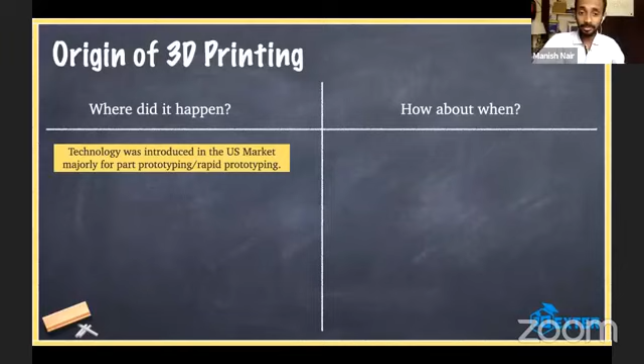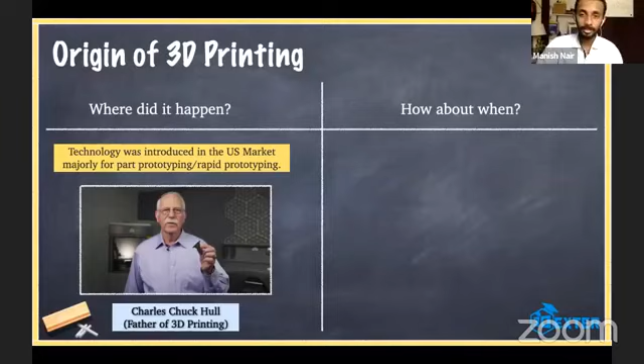Looking back at history, this technology was introduced in the US market, primarily used for commercial prototyping purposes. The gentleman you see on screen, Charles Chuck Hull, is considered the father of modern 3D printing. This technology came into existence in 1984, though the patent was granted in 1986. The technology came out for industrial applications in 1984, and people started utilizing it for all sorts of commercial and industrial applications.

But in today's times, people are using 3D printers. 3D printing has become so cheap and so easily available to every person that it is now accessible to each and every person. In fact, everyone on this call can have access to a 3D printer and realize the project they're currently working on.

I want to show you a very small video which tells you some things about the technology and where it particularly stands. I'll just run this video now.

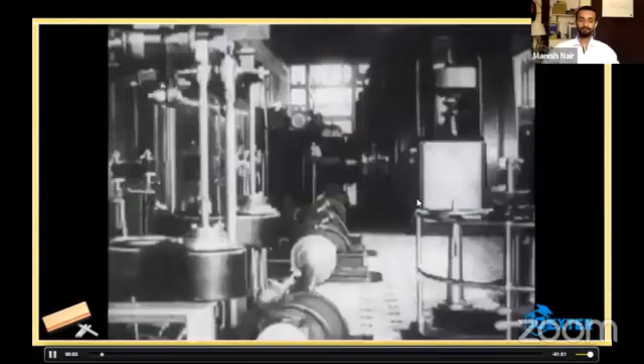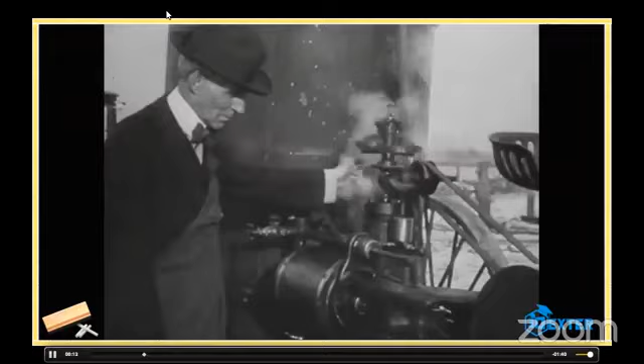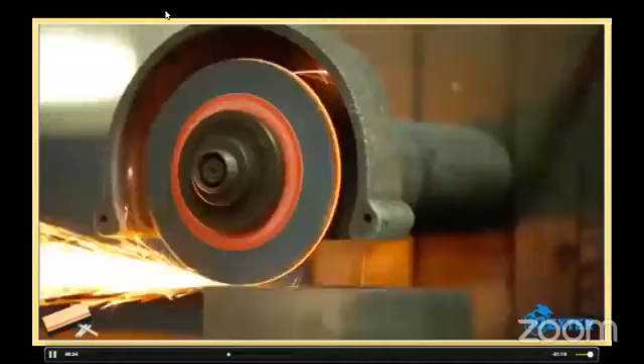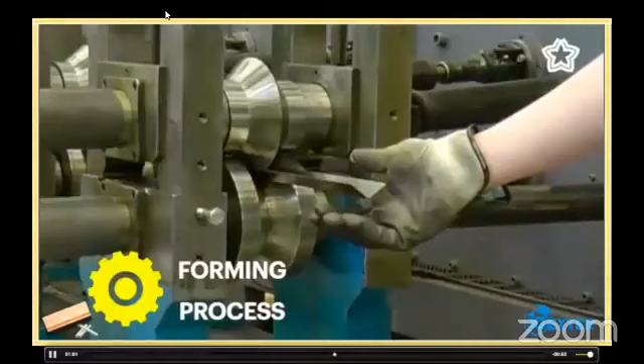For centuries, manufacturing processes around the globe have seen a paradigm shift in the way products are manufactured. These mega mass-producing factories have been able to satisfy the needs of millions of people with products we all love to use over and again. Thanks to the Industrial Revolution that made all of this happen. Most of the objects we see around are manufactured by conventional methods like casting, machining, or forming processes. If you look around your surroundings, pretty much everything you see, from the dress you wear to the technology you use, is manufactured by one or a combination of these processes.

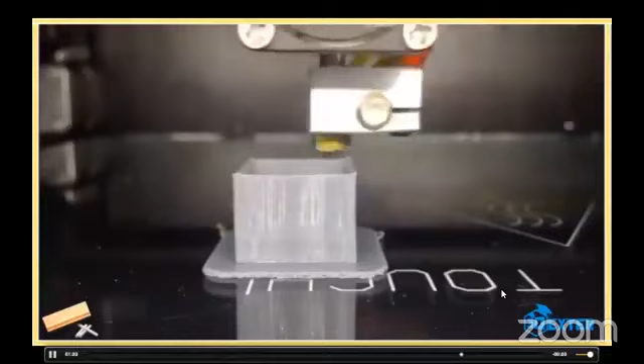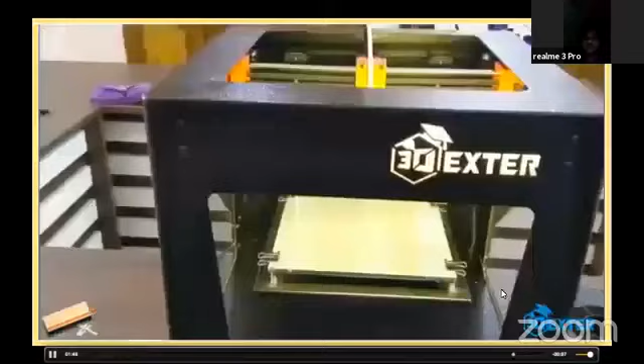In these fast-changing times of the 21st century, one of the technologies that has gained immense popularity and momentum is additive manufacturing, or 3D printing as we like to call it. It all starts with a design that you can create on any CAD platform. Then you eventually slice the model and finally 3D print it to bring it into reality.

All right, so that was a very small video that talked about the basics of 3D printing. I'm sure you noticed that the process of 3D printing starts by making a design. You can create this design on a computer, get it from a free hosting website, or scan a particular model, but essentially you get the design file. You take this design file to a slicing software, which slices the model into numerous layers, and this sliced file is then sent to the 3D printer for final 3D printing.

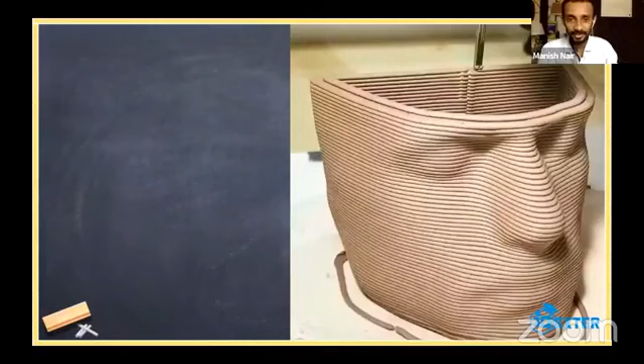I hope you really enjoyed viewing that 3D pen demonstration. Now, for those of you who did not understand or were not able to see it properly, I have got a small video showing you how this layer by layer process takes place. So enjoy this video, and I'm sure you will get a little more understanding of how this works.

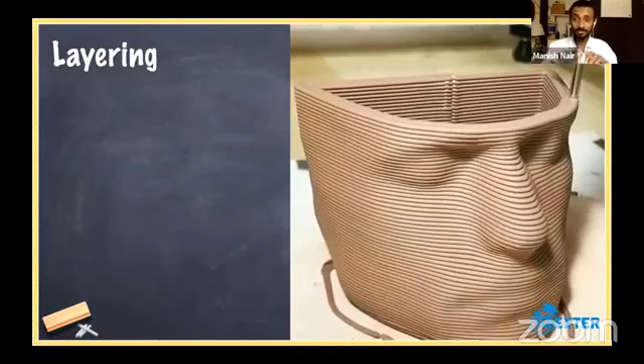This is basically clay 3D printing. So like I was mentioning, it's not just about thermoplastics. You switch to a different technology and you can use different kinds of materials also. You can see there is a nozzle, and this nozzle is basically taking out material one at a time, making a very small human facial structure.

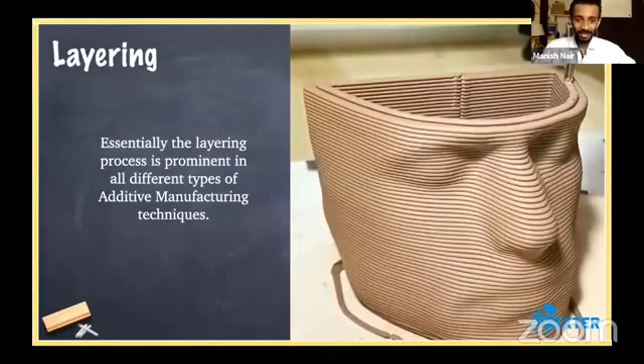Essentially, the layering process is prominent in all different types of additive manufacturing techniques, and this is very much basic to any technology that you can think of. It's quite comforting to see this video, isn't it? So that is what the layering process is. By this process, you form the final 3D object. I hope you got an understanding of what the 3D printing process is and how it basically works.

Next up, I want to discuss why we are even talking about 3D printing. You might feel, why is it that we are talking about 3D printing so much in today's times, in 2020? There are a couple of reasons. Many people say subtractive manufacturing is already there, so why are we switching to a new technology? We have got CNC machines, we have got a proper distinguished machining process. Why are we switching to a new technology?

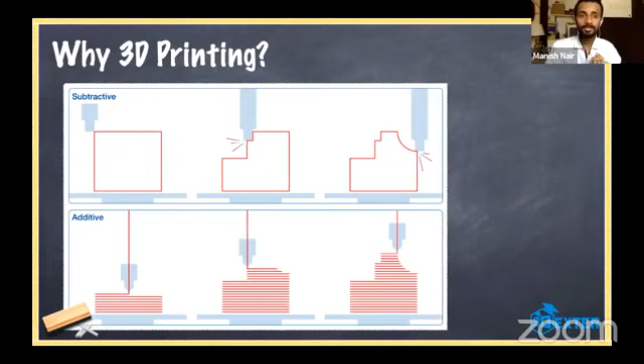What is the need? Now, to answer that question, there are many designs out there in the world which cannot be manufactured by any method that's available in the world. So for those kinds of designs, you will have to switch to a method that is additive in nature, and you can very easily develop that.

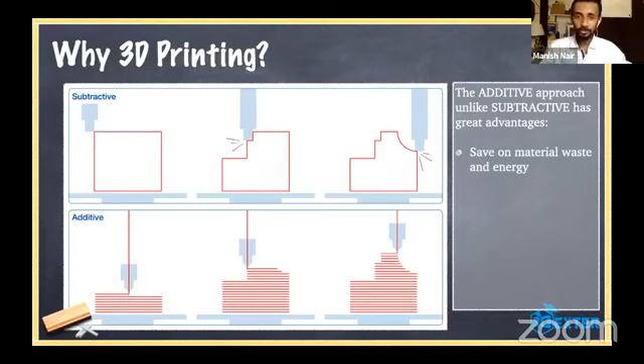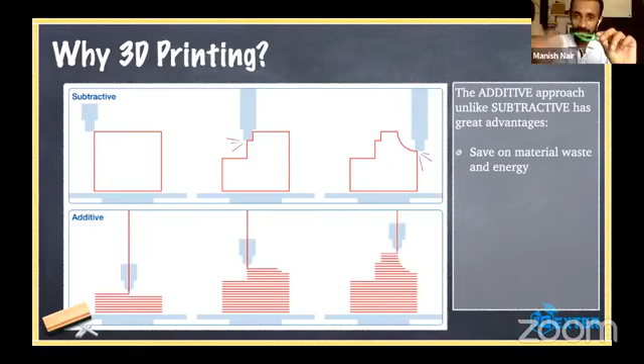So some of the key advantages of additive manufacturing are: one, it saves on material waste, a lot of material waste, and it saves on energy also. If you compare a CNC machine and a 3D printer machine, the power consumption used by both is miles apart. And if I show you this part we just made out of a 3D pen, you take out material only at those parts where you need the filament to come out. So there is ideally very less wastage compared to subtractive methods.

Second, like I mentioned, you can manufacture some very complex geometries. Third, and most importantly, you are able to do quick prototyping with very less lead time. Say 5 years back, if I wanted to come up with a new product or work on a new project and develop that first prototype, I would have to go to an injection molding equipment manufacturer and ask him to make a mold for this particular project and give this mold to me.

This entire process takes close to 3, 4, or 5 months of my time, and it will take a minimum of, say, 50,000 or 60,000 rupees to get that die prepared for the mold. Now that entire perception has completely changed because of 3D printing. Using 3D printing, prototyping has become so quick that within a few hours or a few days you can get your first prototype ready, and you will be pretty much very happy to see that.

Lastly, there is a very interesting case discussion happening all around the globe, which is about mass customization. In a very highly globalized world of today, we are actually moving towards customization. If you look at the mobile phones, if you look at the gadgets we use today, they are highly customized. And to meet customized demands of users, you need a technology like 3D printing that can cater to the demands of different kinds of people.

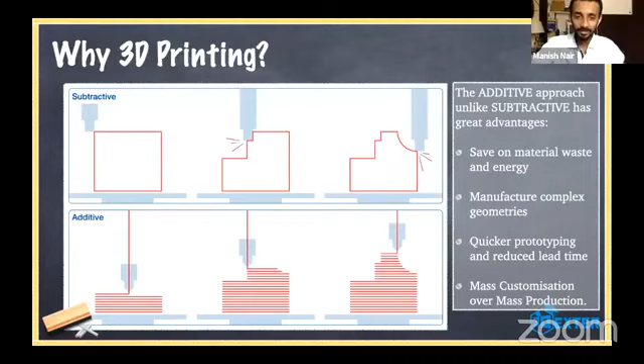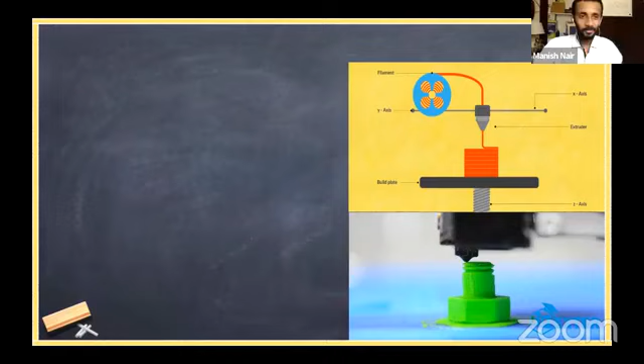All right, so we are done with the first part, understanding what is 3D printing. Now we are diving into the types and applications of 3D printing. This is one of my favorite parts, and in the next 20 to 25 minutes you will get a complete understanding of the different types and applications of 3D printing. So let's just quickly get started. The very common type used all around the globe is known as fused deposition modeling.

It's also known as fused filament fabrication. You can see that there is a material at the back. If I were to show you this material, it's the same material that we use in pens in an FDM based machine. So this material goes inside your 3D printer.

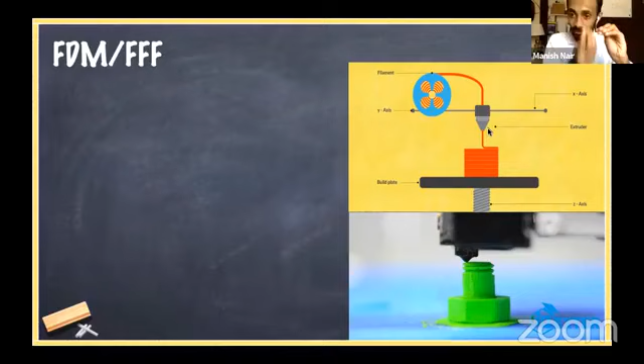Right now I have a 3D pen. If you had a 3D printer, it goes inside a 3D printer. There is a nozzle at the tip. This nozzle gets heated and the melted filament comes out of the printer, and finally you can see the files being printed. So you can see it goes layer by layer.

I'll just show you in this particular graphical representation. You can see it moves along the trajectory of the CAD file.

Right now, fused deposition modeling, or FFF, is the most common type of 3D printing. Many people say it's very common, but the reason for the popularity is because of its ease of operation. You can very easily operate a 3D printer. We have a 3D printing curriculum running in schools where children in 5th standard use our machines. Can you imagine, 5th standard? So that essentially means you need not be an expert in technology to operate a 3D printer.

Second is its cost. 3D printers are very cheap nowadays. And the third and most important part is its usability. Like I was mentioning, prototyping becomes very quick. Using an FDM based 3D printer, you can create prototypes real quickly and get to the final objective of coming out with the final product. One thing I want to tell you is material compatibility - thermoplastics is the major material used in FDM or FFF types of machines.

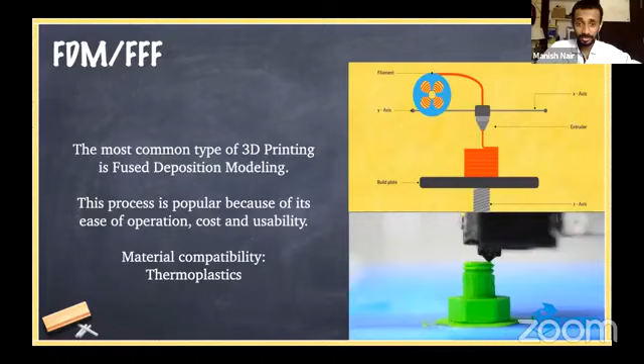Next up, I want to show you some more techniques used all around the globe. As you can see in this graphical representation, SLA is one technology which stands for stereolithography. In this technology, you have a liquid material and there is a scanner system. This scanner basically scans the CAD model layer by layer. After it scans one layer, then only the platform goes a level down. That is how the final object comes up.

Liquid material, or a material like resin, is used in these kinds of technologies. It's very handy and useful in medical technology. Medical practitioners use the SLA technique to create all sorts of applications. We'll come to the applications.

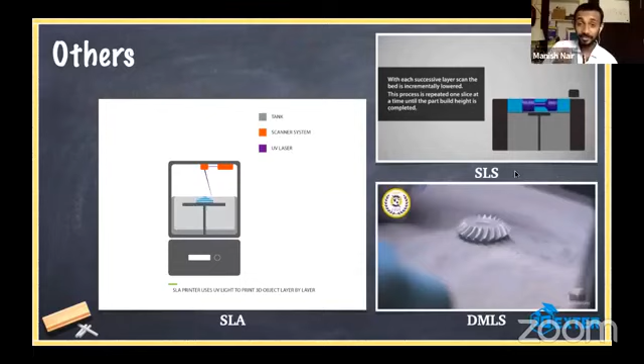Second one is SLS, which is selective laser sintering. In this process, you can use powdered material - it can be thermoplastics or metals. These kinds of powdered material are laid one layer at a time, and then there is a laser scanner which scans those areas where solidification is supposed to take place. Using this, you can get the final object.

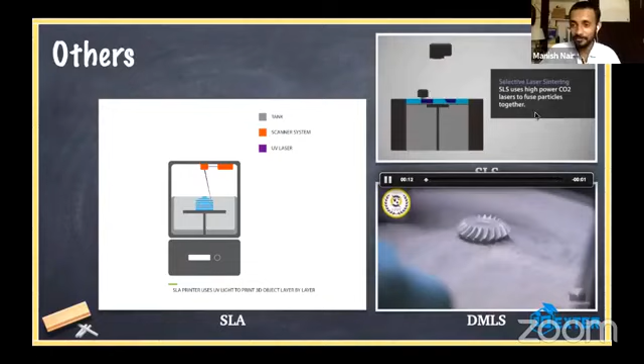Finally, I want to show you DMLS, which is basically somewhat like selective laser sintering, but in this process you use metal alloys. You can see in this graphical representation there is an engineer. The white color you're seeing is basically metal powders.

I think there is one person who is wishing to... Okay, just a minute. All right, so there was a small glitch that was happening.

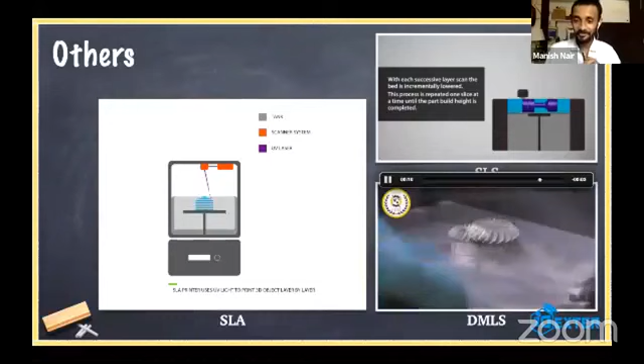Now it's fine. So in the DMLS method, you have powdered metal. You can see this engineer taking out powdered metal from the surroundings, and you get the final 3D printed part made out of a metal alloy. Commercially, as of now, I think close to 8 or 9 different types of metal alloys are available to 3D print if you go for a DMLS technique. But essentially, like I told you, it's layer by layer printing only. That's one thing you need to keep in mind.

Next up, I want to show you some examples of prototyping - what are the different kinds of designs that can be printed out of a 3D printer. You can see this is a pipe design, which has a curved opening at both ends, and these kinds of designs can be very easily made. It's an industrial prototype of a very small pipe design.

DLP is a technology that is used extensively in the jewelry industry, as you can see in this particular image. This is a prototype of a jet engine. Yes, it's not about the small parts - you can actually create major parts.

You can create as small a key, similar to a keychain, using an SLA machine. And this is a process called binder jetting.

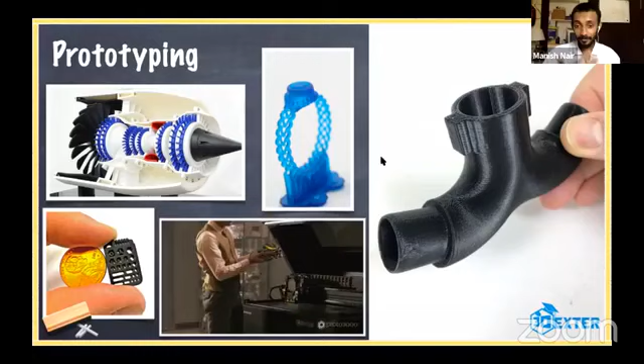You can see this engineer basically taking a helmet out of the machine. If you want a prototype in the actual colors, these kinds of models are also possible to develop out of a 3D printer machine.

Next up, the very interesting part. We are done with the major types of 3D printing methods. Now we're heading towards applications, and I'm going to show you the major kinds of applications prevalent all around the globe. If I'm being honest, applications of 3D printing are vast, and many industries are using it. But for the scope of this webinar, I've tried to include the most important ones that people new to 3D printing should know about. There are going to be some surprises in this section, so let's get started.

First, I'll discuss applications in the medical and healthcare sector, one of the greatest benefiters of 3D printing. Next, we'll go towards automobile, another greatest benefiter of 3D printing of all time. Another application area is aerospace, where we'll look at the different types of applications. We'll also look at how education and R&D are using the technology to come up with innovative projects.

Then we'll look at customization. Remember, I told you about mass customization? This is the section where we'll talk about what customization is and what it has to do with 3D printing. Finally, I'll show you some use cases of this technology in pandemic-like, emergency situations, and how this technology can be of use in those cases.

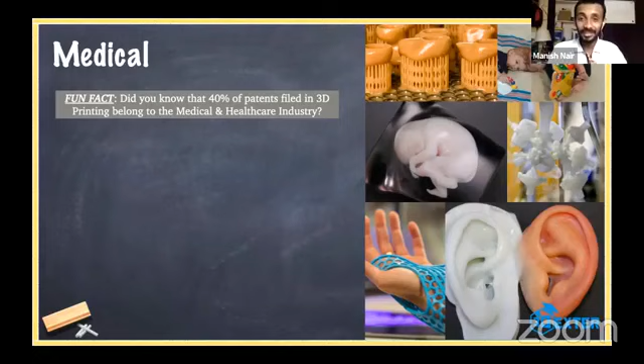There are way too many developments happening in this sector. For example, you can see these hearing aids that are now close to 100% 3D printed in the US. This is a statistic from EnvisionTEC: 96% of hearing aids, not 100%, are now 3D printed, with 10 million in circulation. That's a huge number.

Next, there are surgeries that eventually take a lot of time, and it's really difficult for doctors to come up with techniques to address these medical issues. It takes as low as 23 hours, which could have taken 97 hours for surgeons. This technology is not just giving another option for doctors, but also a lot of confidence, since they can practice the complete surgery on a mock model first, and then switch to the patient.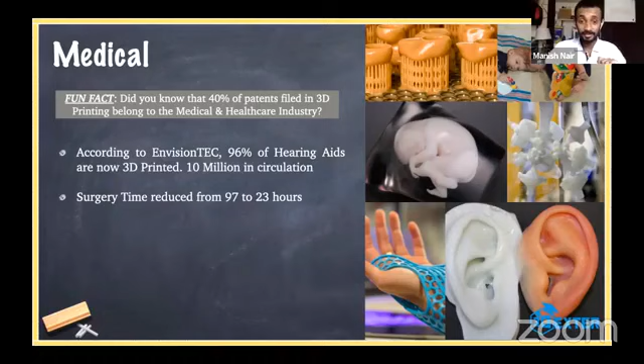Czech and Israeli researchers, among others, are doing a lot of research globally, and you'll be surprised to know there are functional 3D printed organs out there in the research field. Israel printed a 3D printed heart. There's also good research happening in the US where they've printed soft replicating cells of the human brain. You must be aware the human brain is the most complex human organ we have, and you never know how it actually works. So to address that, researchers have tried to replicate the entire structure of the human brain.

They are conducting experiments to see how the human brain reacts to different reactions. That's how research is going ahead in the field of 3D printing. Lastly, 3D printed medicines and prosthetics have already been a huge success. You can see this silicone-made prosthetic ear compared to a 3D printed prosthetic ear. Cartilages can be very easily 3D printed.

There is a specific compound called calcium hydroxyapatite, which is a compound of calcium, used to print bone structures like the bones we have in our body. These kinds of structures are also nowadays made out of 3D printers.

Now I want to show you a live video, not a demonstration. This video is taken from Stratasys India and shows a case study from India. You might be thinking we've only talked about the whole world so far, but let's talk about India. So I'm going to show you a small clip of a case study conducted in India. Let's move ahead.

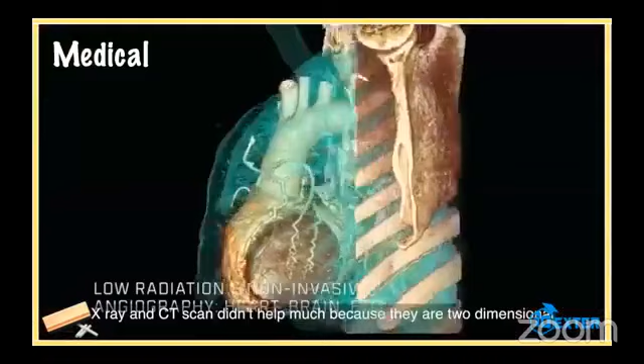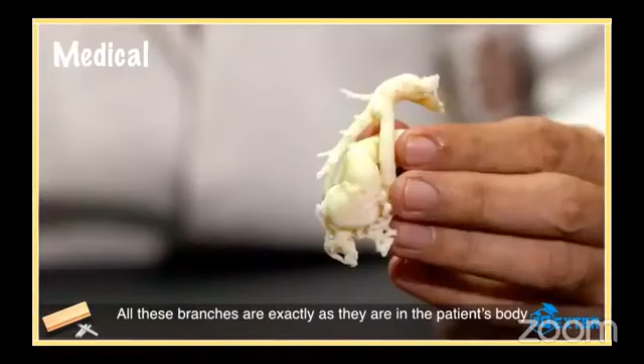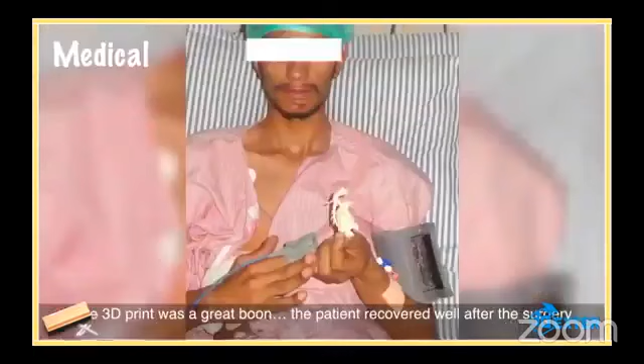Guru Nanak Dev Engineering College was started in 1956. Manufacturing Research Lab was started in 2012. Dr. H.S. Vedi contacted us, wanting a 3D image of a patient's lung. My patient was a 23-year-old young man whose parents told me he had been turning blue, with a mass where the blood was recirculating - called an arteriovenous malformation. An X-ray and CT scan are two-dimensional. We converted those DICOM images to an STL file, and the files were printed on a Stratasys uPrint 3D printer. This is the 3D print, and all the branches are exactly as they are in the body, since I could not see through the blood or the lung otherwise. This was actually present in our operation theatre. It took us about 1.5 hours instead of 4 hours, because we had absolute knowledge of where the artery was. The blood loss was next to nil. This was a great boon to us. Within 2 days we were able to send him home, and his nails are now absolutely pink. So hats off to technology.

Now that you have seen that small video of how 3D printing is being utilized in India, you might feel more confident that this technology is not just about the outside world, but India is also utilizing it. Moving on, I want to show you how the automobile sector is taking up this technology.

I have some very interesting images. This is a classic example of topology optimization, where you reduce material to come up with a final object that serves the same function. These kinds of structures are now made out of 3D printers. This is a windshield, this is a complete chassis, and this is a 3D printed car. The car is named Urbee, and the complete shell of the car was 3D printed. So it's not just a small object like a gear - people have been printing complete cars too.

A very interesting case study in automobile: 3D printing has been seen to disrupt the supply chain and intellectual property security. This was observed in the US, and this statistic is taken from the United States - 64% of US manufacturers expect 3D printing to be used to make obsolete parts in the next 3 to 5 years.

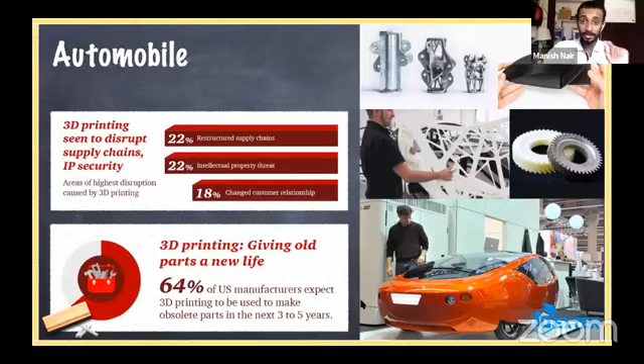Now I want to show you a very small video of what kind of prototypes are made out of 3D printers in the automobile field.

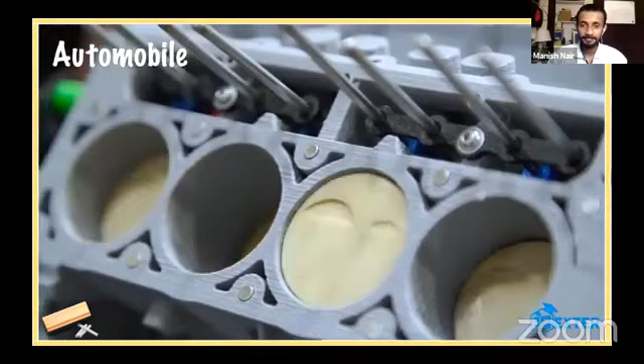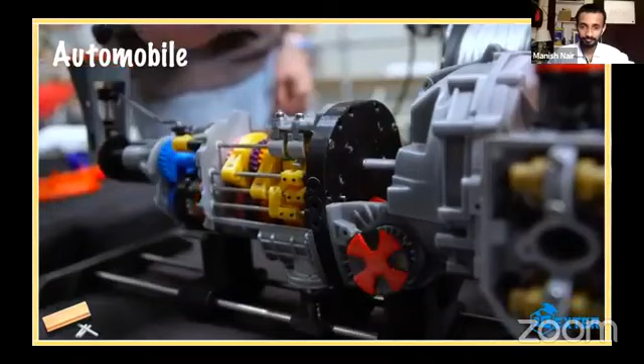A 4-stroke 3D printed engine is extensively used in the automobile sector, and as you can see, it's a working one - all the parts can be individually 3D printed and attached. If you look at the parts of an engine or gearbox, there are many critical parts involved in the assembly. These parts can be 3D printed and used for functional testing. This is how engineers from the automobile field use 3D printers for prototyping, but apart from prototyping, they also use it for actual part production.

Now I wish to come towards aerospace. I think there are quite a few people raising hands - I'd like to request the host to admit them.

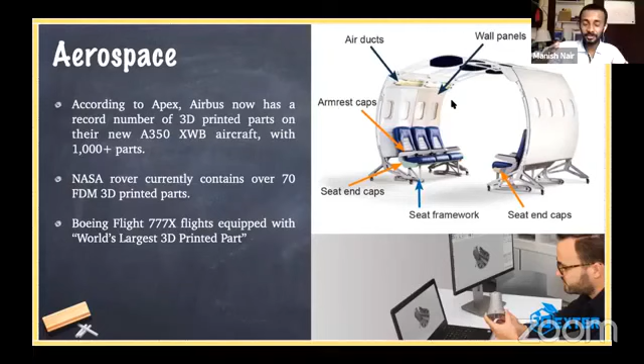But if you go for larger parts, I want to tell you that this video I'm going to show you covers the entire wingspan of an aircraft. So now you can imagine the expanse of this technology, and I'm going to show you that video. Enjoy this video.

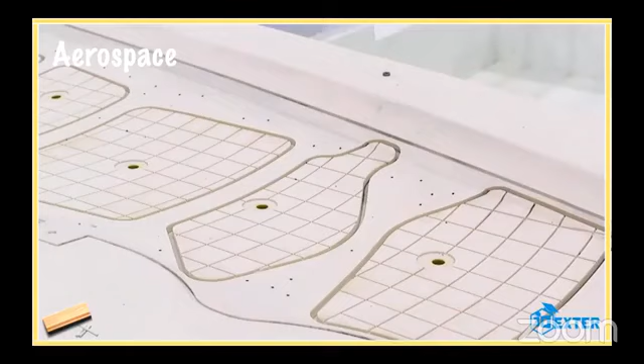Your build. Making the tool using traditional manufacturing methods would have taken about 3 months. Using 3D printing, it only took 30 hours. But even as it was printing, Matlack says they didn't really know if printing the tool would actually work. Nobody was positive, nobody knew going into this that we were going to have success. The 777X program was counting on us because they didn't have a tool planned for this particular part. So we had to have success. We found a way to make it work.

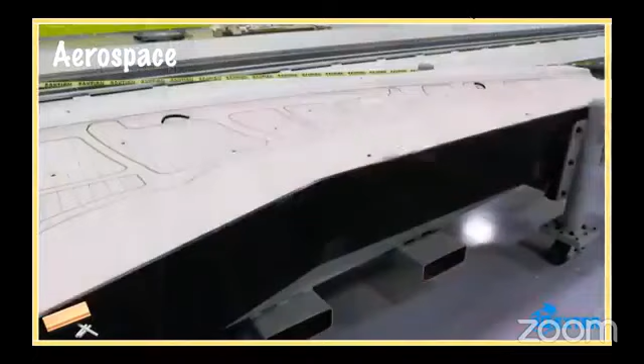And so they did. Weighing in at 1,650 pounds, measuring 17.5 feet long, 5.5 feet wide, and 1.5 feet tall, it is the largest solid 3D printed object.

All right, so now we have seen the largest 3D printed object, and as you can see in this text, it has received the Guinness Book of World Records award for the largest solid 3D printed item.

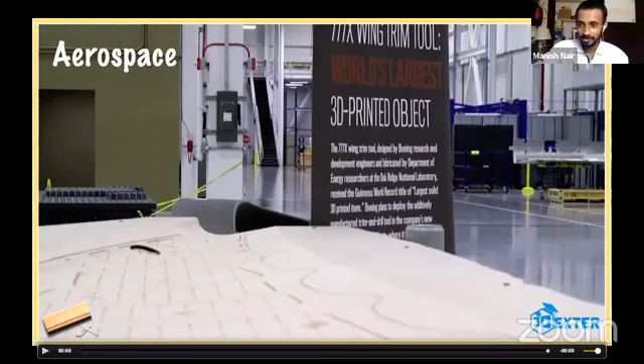Now we are coming to education, and this is the part where I'm going to show you a live demonstration also - not a video, but a live demonstration. But before coming to the demonstration, I want to tell you that in the education field there are quite a few applications being utilized.

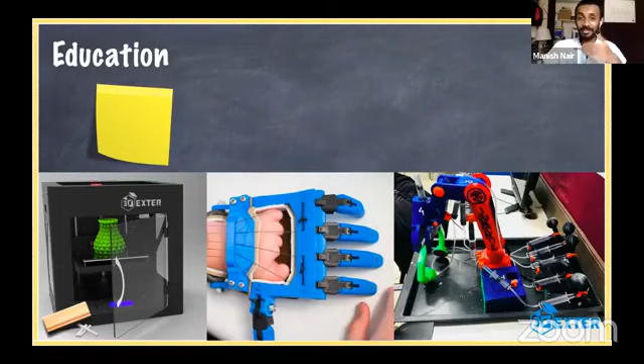So this is something that was made possible in one of our schools, where a student was supposed to make this hydraulic arm, and you can see all these parts are 3D printed separately and finally joined together to come up with the final product.

In education, if you have a research or product idea, you can very easily prototype it using 3D printing technology. It's very cheap, very easy to operate, and finally you can test out these projects. Because of this, many people are able to come up with an idea in a shorter time. Generally, it takes years for an idea to develop, but that has reduced because they are now able to test their prototypes much quicker. So that is how education and research institutions are using 3D printing.

Now I want to show you a live demonstration. As I was telling you, I have got a prosthetic hand right now. Sahu sir was mentioning a prosthetic hand, so I have got a 3D printed hand with me, and I am going to show you that. For that, I will stop my screen and show you the hand actually. You can see this is the prosthetic hand that I have, and it's so elegant. It has got all the parts I was mentioning: the fingers, the armrest, and you can actually tie it to your wrist.

So this is a model. You might think, okay, I am not a doctor, so I cannot use it in the medical sector. But if you are engineers, you can do something like this and help out children or people who do not have hands. This is a proven project. There are many companies in the West who have utilized this technology to build actual prosthetic hands, and they have started distributing it to people who need it. So you can see it's a working prosthetic hand, although there is no electronics integrated to it yet, but it's still under development.

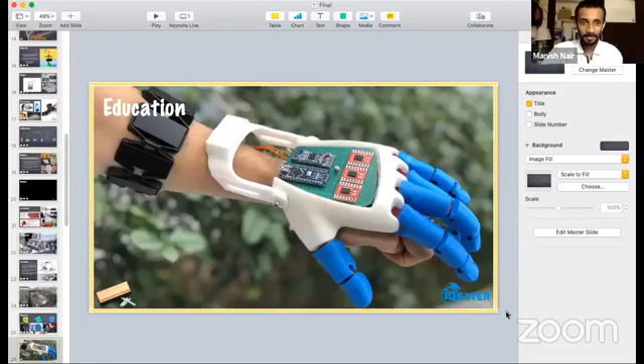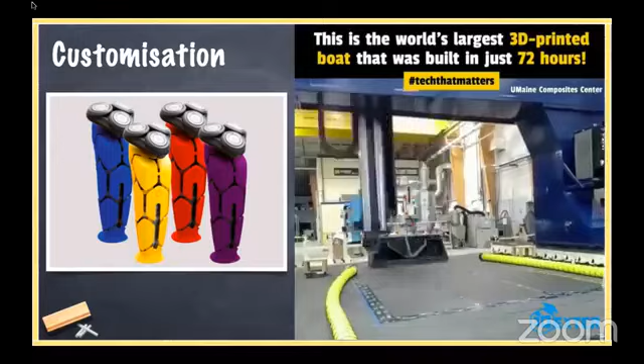All right, so that was the world's largest 3D printed boat, and you can see they even tested it out. This was inaugurated in front of a huge audience. So that is what the potential of 3D printing technology is.

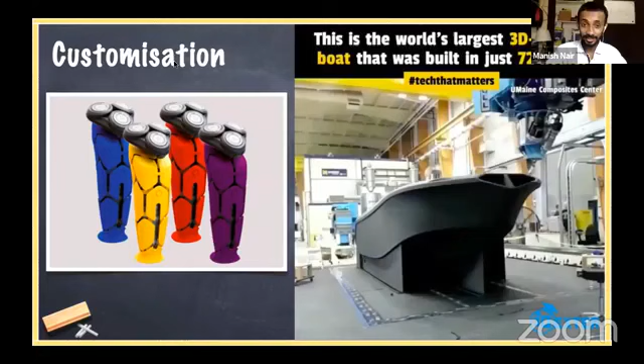Next up, I want to show you how 3D printing is taking charge in times of the corona pandemic or emergency-like situations. Whenever there is an emergency, let's say there is a war happening, or a pandemic, essentially emergency-like situations, there are always lockdowns, and manufacturing industries and companies can shut down. But what happens is, in these kinds of situations, 3D printing can provide a solution that can be generated sitting at your homes, and you can help out people who actually need it.

So even during COVID-19 times, there were quite a lot of additions. You can see this is a face mask that was 3D printed at our facility in Delhi. We have got a COVID-19 safety key. This is an oxygen valve that was 3D printed, and it was used in, I think the name of the company is Isinnova, that printed the very first oxygen valve. It is used in the ICU department, the intensive care unit.

These are quarantine homes that were set up in Wuhan, the place where the virus originated. These quarantine homes were very much necessary, because you don't have too much time to think about manufacturing and to come up with all sorts of solutions. You will have to do things very quickly. So in those kinds of applications, you will have to switch to a technology like 3D printing that is capable of coming up with solutions in very little time.

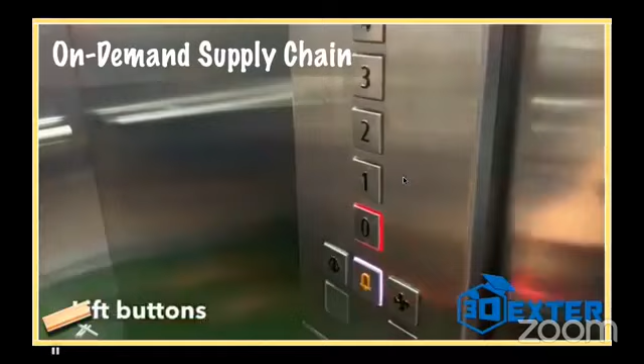All right, so you can print something as small as a safety keychain, and you can use it in your day-to-day lives. So that is what the potential of this technology is.

Now we are heading towards the third part, the most interesting section, where I am going to show you the actual process demonstration. In this section, we are going to show you the demonstration of the complete software.

We will start with a model that we'll create on a CAD platform. Then we'll take that model to a slicing software, and printing the model will take a lot of time, so we cannot wait until the print is over. So I have got a printed model in front of me. I'm going to show you that model, and I'm going to demonstrate to you that it's so simple that, sitting at your homes, you can do this.

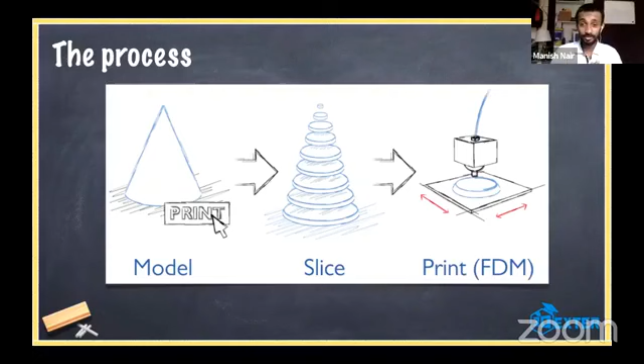All right, so let's just quickly get started with designing. Okay, so I will share my screen.

I hope the screen of the software is visible to everyone. I'm using a software called SketchUp. The reason I'm using this is because the software is pretty easy to use. It gets installed very quickly. It doesn't require too much hardware and software requirements. You can also get this software, it's a freeware, you can get it on Google.

Now what I'm going to do next is design something. Let's design the safety keychain. You might be wondering how can I do that? So this is a 3D design software, and you can see there are 3 dimensions: this is X, this is Y, and this is Z. You can call any of these axes X, Y, or Z. I am going to start designing this small keychain.

I'm going to start with a small rectangle. Now, rectangle is a 2D shape, everybody knows that. I am going to give it dimensions, you can look at the lower portion, the dimensions are mentioned, let's say 100. So I've made a very small rectangle. Now I am going to see it from this perspective.

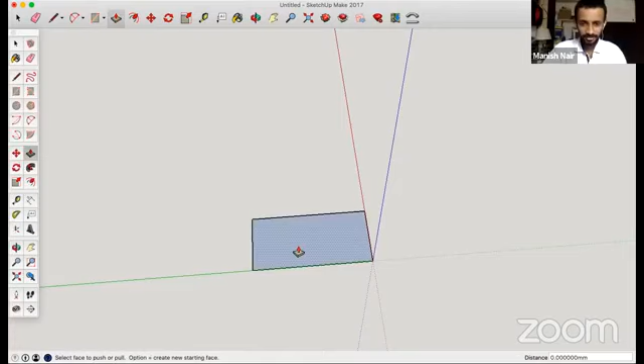Next, I am going to make a small arc on this section, or I'll just make it a little thick. Now I am going to make a small circle. I'll use the arc tool. And I have made a very small arc.

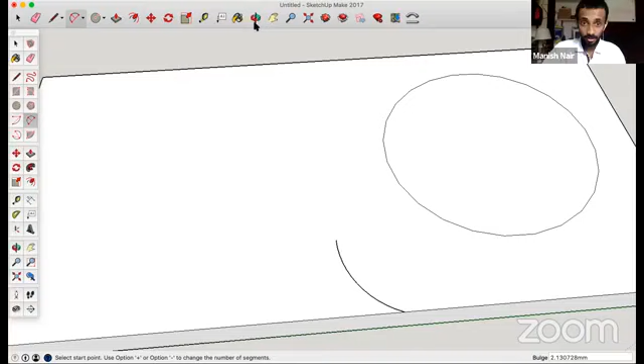Now, next up, I am going to take this line. Not able to see it properly, just a moment. So I've come to this section. Now I'm going to use the arc tool once again.

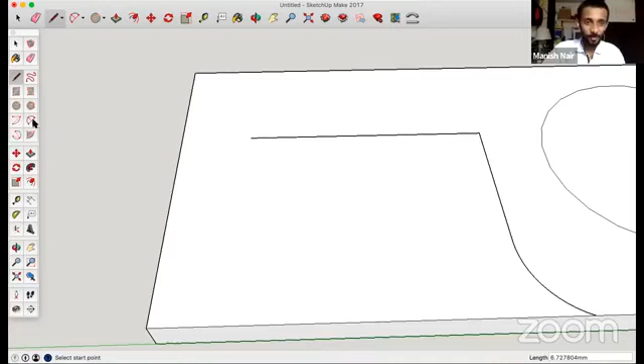It's a keychain. This is the hole, and this is the cut section. Now I'm going to make some features to it so that it looks a little more realistic. Ideally, when you design something, you have to make sure it's designed according to dimensions, but for this demonstration purpose, I wish to show you that designing is quite easy.

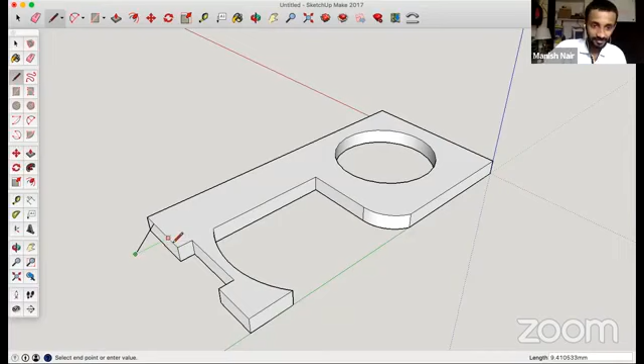Lastly, I've made a very small triangle. So you can look at this particular design, which is a very preliminary design. It's something that's not a very good design, but a simple design that we designed in just about 1 or 2 minutes.

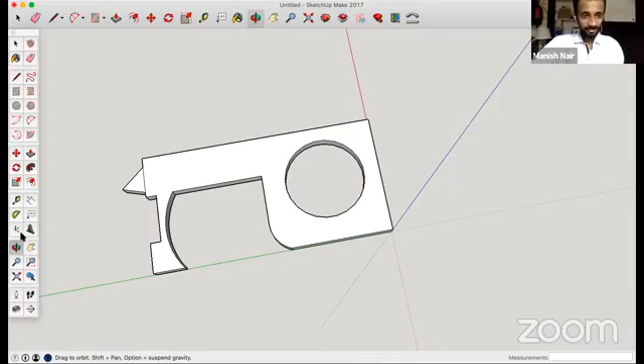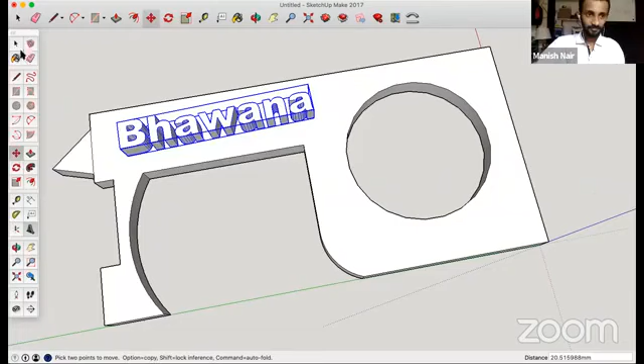And I will mention one of your participants' names. I'll mention Mr. Bhawana. So I'm mentioning your name, sir, let's see how it comes out. I'll just rotate it, move it, and place it. Okay, so you can see that I pasted a name on top of it.

So let's just assume that you have 5 members in your family. You can get each of your family members printed with a COVID-19 safety keychain so that whenever they go outside, they can use the safety keychain wherever possible to avoid contact. So I have made this design.

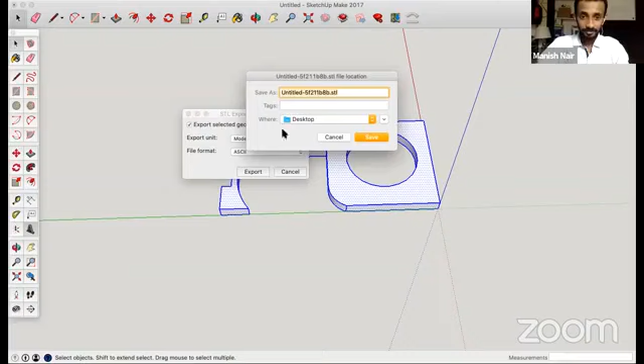How much time did we take? I think close to 3 or 4 minutes. Now this design is completely ready and I am going to export this design to a software called Cura. So I'm exporting this design, I'll name it after sir, Bhawana sir. So the file is now ready. We are done 50%, now the next 50% is basically on the second software, which is slicing.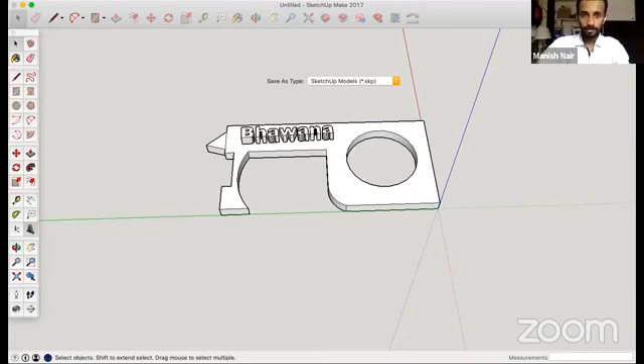So I'm going to close this design. I'll save this design probably on desktop itself. All right, so I've saved this design and I've closed it.

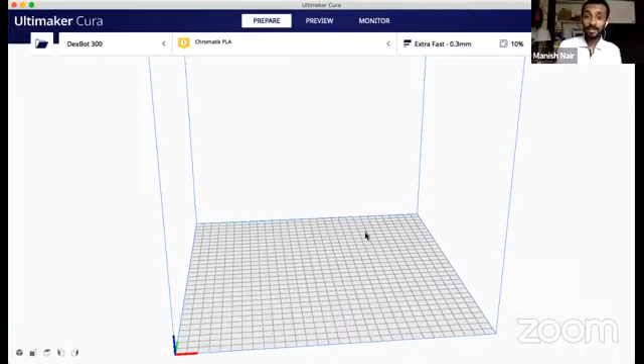Now I'm going to share a screen where we are going to understand how slicing takes place. This is the software where slicing takes place, where we will be able to see the layer by layer simulation of the file. I am going to bring my file to this software. We know the name of the file is Bhawana.stl, so I'll just take this file. All right, so there we go. This is the file that we have got, and I'll just rotate it so you can see it properly.

All right, I'll bring it to the front so you can see it properly. Interesting fact: this is the file we just designed 5 minutes back. I'm going to slice this model so you can see the different layers and the time it takes. This particular model takes 35 minutes, but had I designed it with exact dimensions, it would have taken a lot less time, probably 20 minutes. So I am going to show you something which will literally blow your mind.

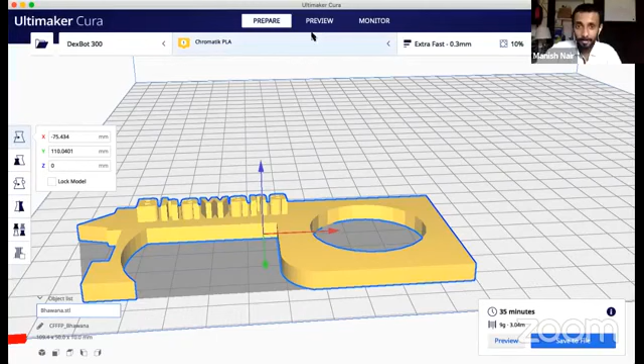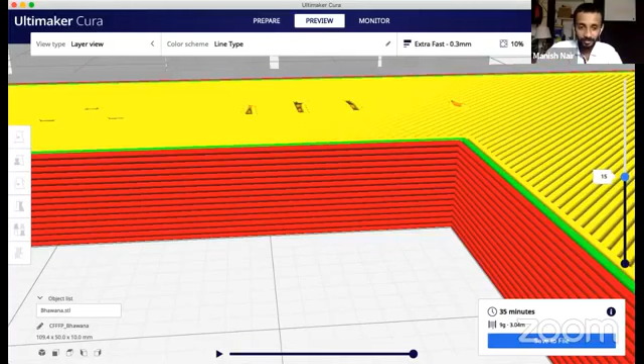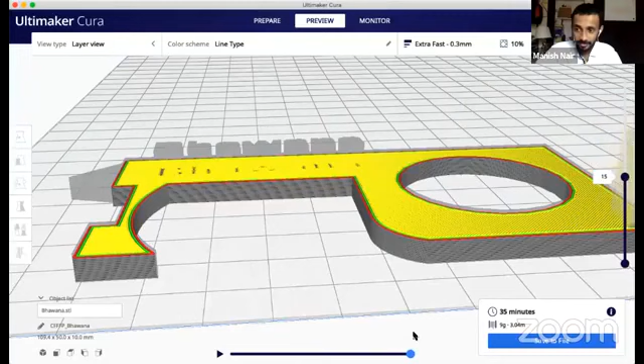We were talking about layer by layer printing, and I want to show you what this actually looks like. If you look closely, these are the layers - the red ones you see. There are 33 layers in this particular model, and it will print one at a time. I'll show you a demonstration. This is the nozzle, the printer nozzle. When it prints, it comes up closely following the trajectory and slowly finishes each layer. This is the 15th layer printing right now, and once it's done, it will move to the 16th layer.

Let's just see this particular simulation. You can see it's printing the name - it's just following the trajectory, focusing on the CAD design provided to it. And likewise, you will see the complete object form.

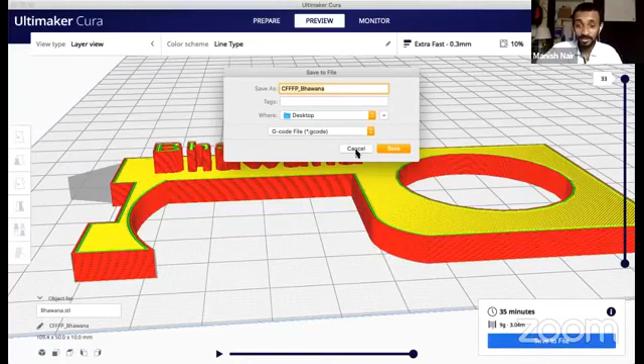Now the process is very simple. You are completely ready, you just need to save this file. You have to send this file to a 3D printer. You can save it to an SD card which can be read by your 3D printer, or you can connect your printer directly to your computer and get it printed. And you can have your own safety keychain in just about no time.

All right, I want to show you now what this COVID-19 keychain is. This is how it looks after you print it - this is the keychain. You can hold it like this, touch some of the parts, and this is the final trajectory.

Let's say you're too focused on just the safety keychain - you can print something like the Vikrant Group of Institutions logo too. This will appear as a mirror image, but this is the actual logo of Vikrant Group of Institutions, which we printed yesterday with all the colors. We just changed the filament while it was running and got the blue color in front. So likewise, you can print a lot of things using this technology.

It's not a very difficult technology. If you utilize this technology for good means, you will be able to use it for a lot of things. Now we are heading towards the final part of this session.

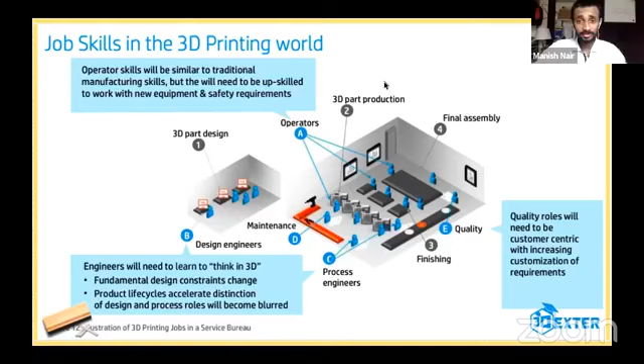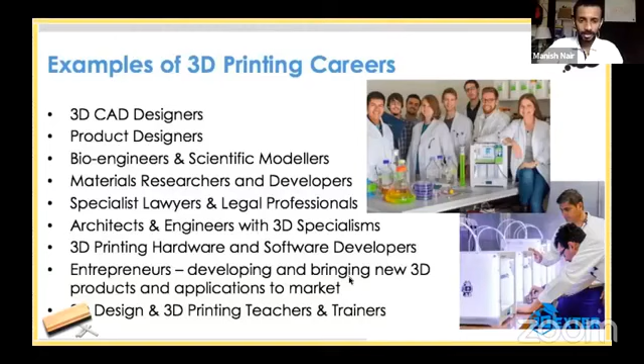And it's not just about engineering graduates, right? It is also for people from other professions - from medical background, from lawyer background, from computer science background, people who wish to develop the software behind the slicing. So those kinds of career options are also highly in need in today's times. This is basically an example of all the 3D printing careers you can look forward to - architects, material researchers, bioengineers.

So what are we as a company, 3Dexter, doing to particularly cater to this problem that society is facing? We are helping the community to upskill by offering an online 3D printing course. I want to show you a very small sneak peek, a 30 or 40-second video that talks about this online 3D printing course. Probably you would be surprised that many people have benefited from this course in the past 3 months.

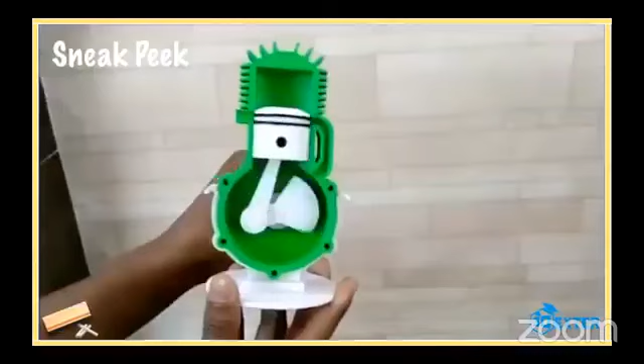Next up, I want to tell you how you as an individual can enter the market. The very first thing is to understand the market, which I'm sure in this session you must have gotten a vague understanding of what the 3D printing market is, its applications, and what skills you need. Once you know this, the second step is to work on your skills. You can work on 3D printing related projects and upgrade your skills if you're completely new to this technology. Finally, you can establish your skills on a digital platform and use networking to make sure you get the best opportunity out there. It's not just about getting any job, but getting the job that perfectly fits your requirements. That can be ensured if you're skilled in this particular technology.